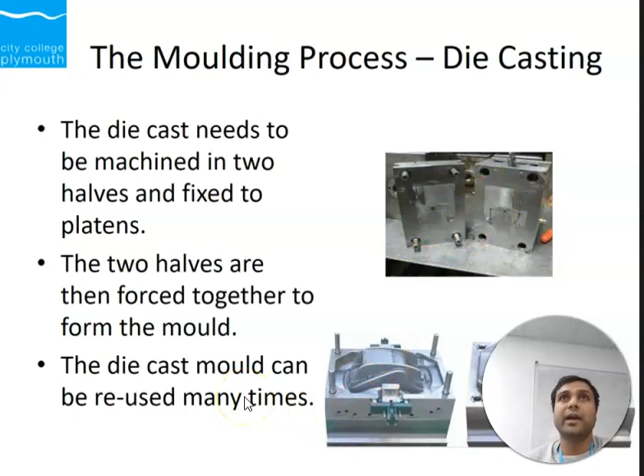All die casting has at least two parts. The ejection, all these things happen through an automated process. Now you can see here the die cast, these are the ejection pins, in two different halves, and they are fixed together. The die cast can be used over and over and over again. Advantage of the die cast as compared to sand casting is a very good surface finish. Sometimes we don't have to perform a lot of secondary finishing process.

For if you're producing thousands, 10,000, 20,000, it's more economical. It gives you good dimensional accuracy and good surface finish. Very thin sections can be formed, and sometimes we can accelerate the cooling. Rapid cooling is achievable. In sand casting, the cooling rate is slow, but metals are good conductors, giving a good cooling rate. The faster the cooling rate, the smaller the size of the grain, which gives them good strength.

Now, disadvantage is it's limited to metal with low melting points. Part geometry must allow removal from the die. For example, if you are forming different multiple parts, you have to open the die, and so on.

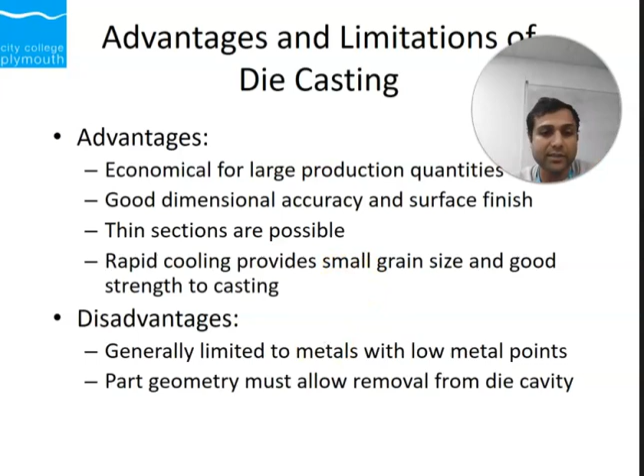Now, the other process is known as investment casting. The first thing we do is create a pattern with wax. Then this wax is usually dipped in a liquid slurry where we have ceramic material. We make the slurry of ceramic materials, and we dip the wax into that, and we put the wax on the sprue.

When that thing solidifies on top of the wax material, we put it in a furnace where the wax is melted and removed. When the wax is removed, we actually pour liquid metal into it.

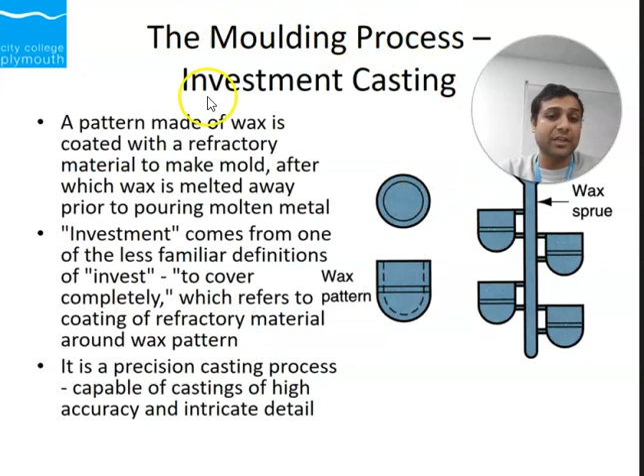The advantages are we can achieve very intricate shapes, very intricate size, very good dimensional control, and very good surface finish. We can reuse the wax as well. This process does not require any machining, it's actually the final product you get. Now disadvantages: multiple steps are required, high skill level is needed, and it is a very expensive process in terms of costing.

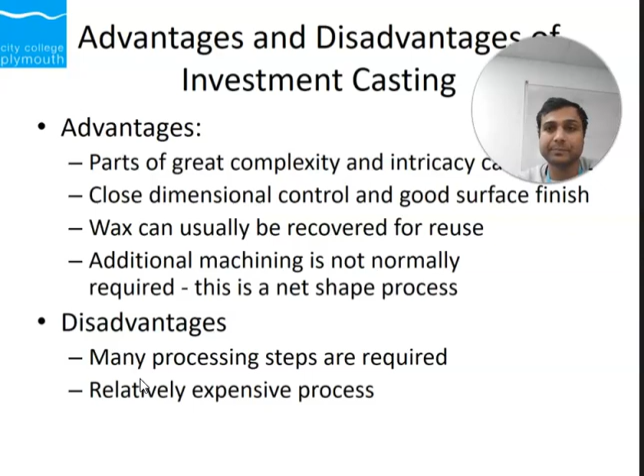Now, after general casting, there are certain secondary finishing processes we have to do: trimming, removing the core, cleaning the surface, and then inspecting it as well. The inspection is mainly non-destructive in nature, where we check if there's any inclusion, any micro void or air bubble in it, which will affect the properties of the material, and so on. We can do heat treatment later on to create homogenization, where all the material has the same properties.

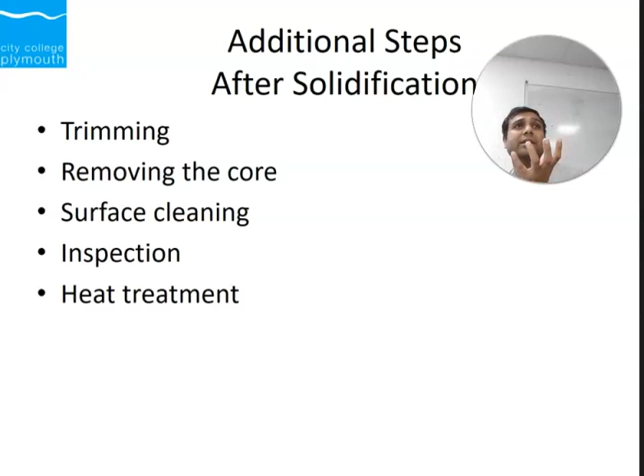Now, castings, when they're done, are mostly heat treated afterwards to enhance their properties. Why do we need to enhance the properties? Because the casted objects are sometimes quite brittle. So later on, when you are performing machining, we don't want them to break, so we perform that process.

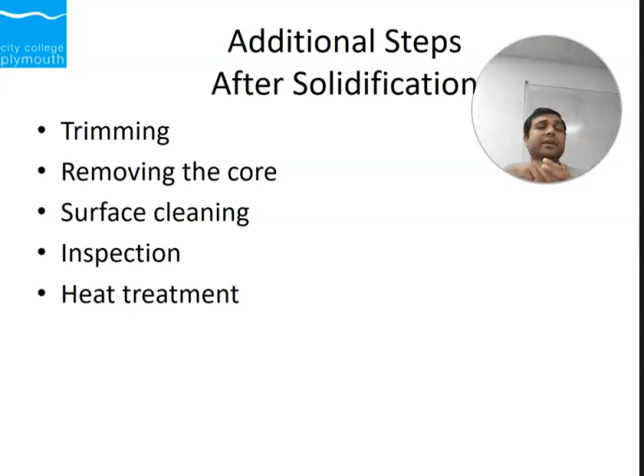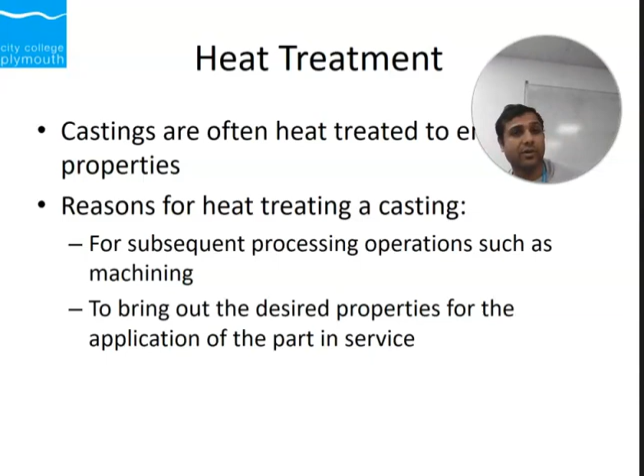Sometimes we want to have enhanced properties, so we carry out some other type of heat treatment. We want to have desired properties, so we do heat treatment. We want to make it ready for the machining process, so we do heat treatment.

Most castings are made up of alloys. They are easier to cast and give you better properties. Why are they easier to cast? Because the melting point of alloys is a lot lower than these pure components. So if you have iron, let's say around 1300-1400 degrees centigrade for pure iron, and you put aluminium in it, the melting point will decrease. Melting point of aluminium is around 660 degrees centigrade.

But if you have pure aluminium and you add iron in it, the melting point of aluminium will further decrease as well, from 660 to that lower point. This is a metallurgical law, which says the melting point of pure elements is always higher than the melting point of its constituent alloys. So we do the alloying to reduce the melting point as well, to a certain limit.

Now, when we do the casting, it's classified as either ferrous or non-ferrous casting. Ferrous is anything that contains ferrum, iron, and we have a different classification. Anything containing more than 2% carbon is known as cast iron. Anything containing less than 2% carbon is known as steel.

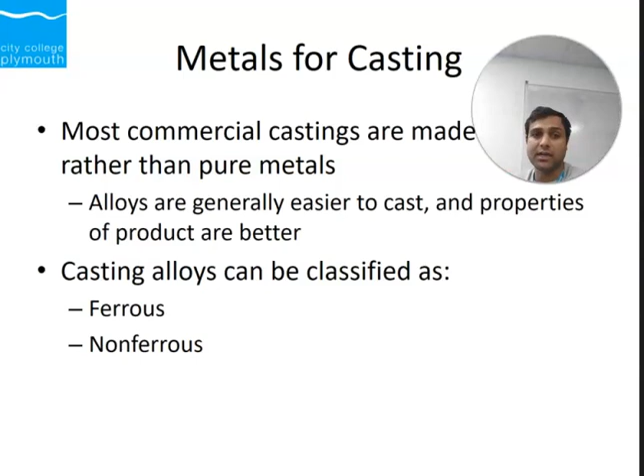Then we have different types of cast iron as well. We have gray cast iron, white cast iron, malleable cast iron, alloy cast iron, nodular cast iron. Now, we also assume cast iron is brittle, but there's a type of cast iron known as ductile cast iron as well. We'll talk about that one in detail.

So we have a malleable cast iron known as ductile cast iron. It has good castability, good ductility, and so on. And it's good for machining purposes as well.

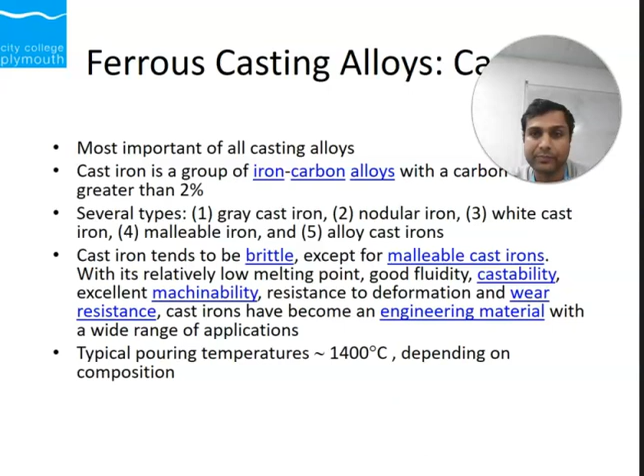Now then we've got the ferrous casting alloys. For example, iron steel is casted initially. It's converted into different shapes and sizes, sent to different industries, which can convert it into different sheets, tubes, pipes, rods. Pouring temperature is usually kept higher than the melting point.

The reason is because if it's kept at melting point, as soon as it touches the die, the temperature is going to reduce a lot. So we want to make sure it's higher than that temperature. So there is some temperature loss, but it still has some fluidity.

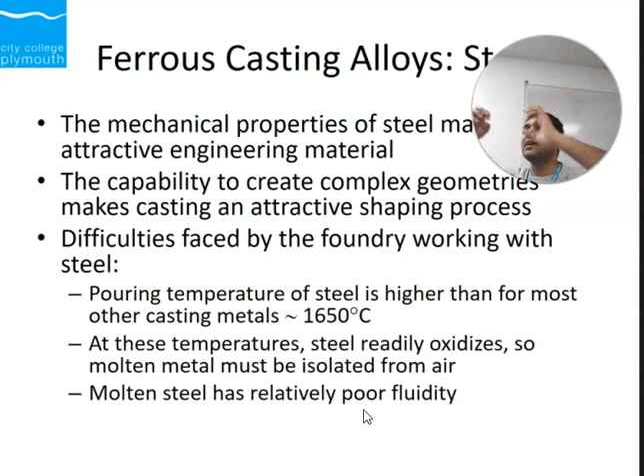Molten steel has poor fluidity, so we have to remember that. Molten steel can react with the oxygen present in the air. So straight away it will react and form iron oxide. So if you are pouring molten iron, it's reacting and it kind of gives you a very nice firework as well.

Now, if we are pouring a metal and we assume that metal is very castable, we make sure the pouring temperature is low, which means we are saving energy. So temperature, we say is TM 660 degrees centigrade, that's the melting point of aluminium.

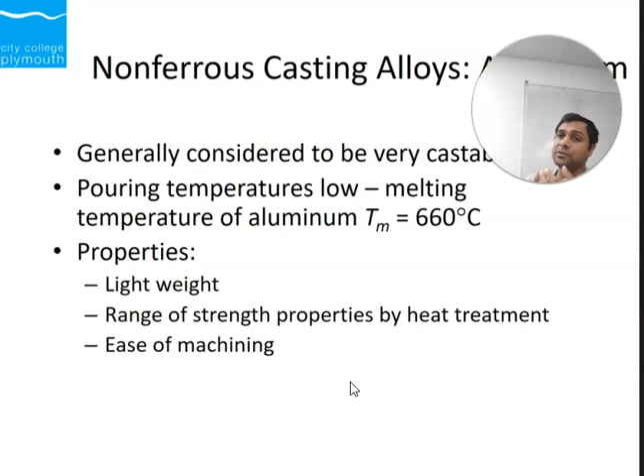Non-ferrous metal, they are lightweight, they are easy to machine, and their properties can be adjusted by doing heat treatment. Non-ferrous metals have other properties as well. They have a good aesthetic look, good bearing abilities, corrosion resistance properties as well. Then there are issues with them too, which is the cost and massive applications.

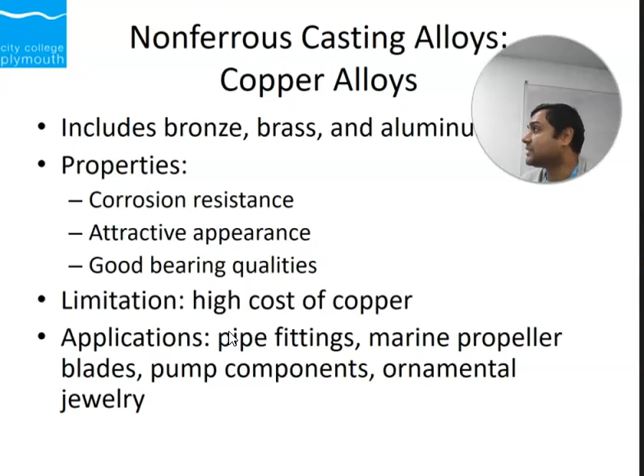Let's say we talk about zinc alloy. Zinc alloys have high castability, common use in die casting. It has a low melting point, which is 420 degrees centigrade. It has good fluidity. It has low creep strength, so casting cannot be subjected to high stresses. Creep strength is tensile testing at high temperature. So the material behaves very differently at high temperature and cannot withstand high strength.

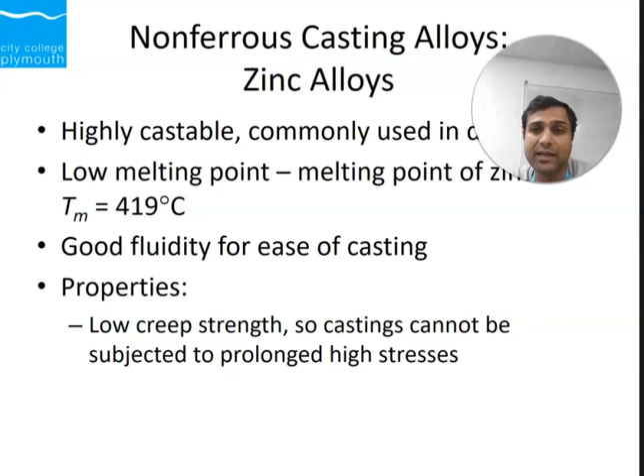Now casting, we said it can be used to produce complex parts, complex geometry, and so on. But there are a few things we can avoid. We can have a simple mold making process if we can eliminate the need for making the core, so if you're creating a hollow component, we need a core inside as well. Then if we can try to adjust the geometry, the cooling rate is properly adjusted, so it can give us high strength rating as well.

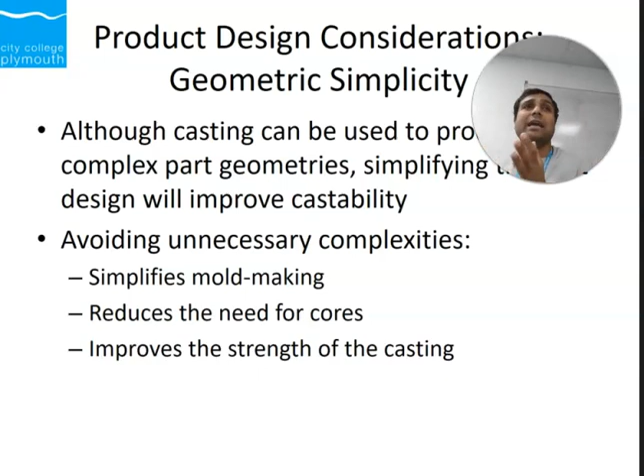When pouring the molten metal, we need to make sure we avoid sharp corners, because that's the area of stress concentration. We need to provide a certain fillet along the sharp corners as well. It's not only for the metal to flow, because when the metal flows, if the corner is sharp, it will create a kind of non-laminar or turbulent flow. That turbulent flow can take away the soil particles if you're doing sand casting. If not soil, if it's die casting, it can damage the corner of the dies as well. So we need to make sure we avoid these sharp edges and so on.

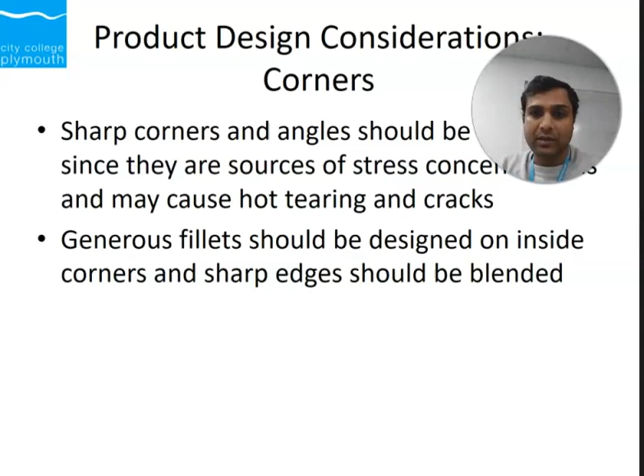Depending on what process we use, we can achieve the dimensional accuracy. Sand casting, not that much. Die casting, yes. Sand casting doesn't give you good surface finish, but die casting and investment casting give you a lot better surface finish.

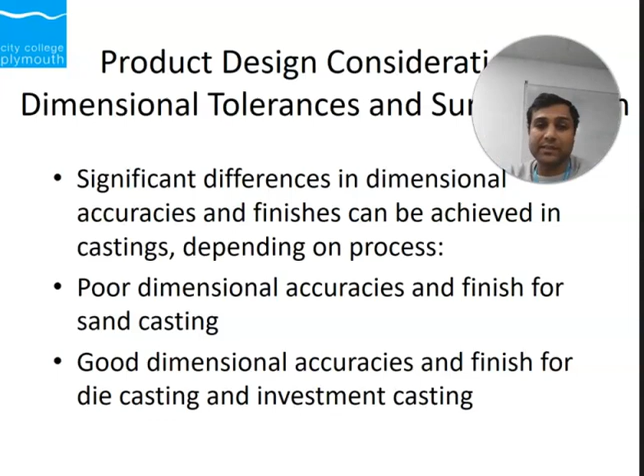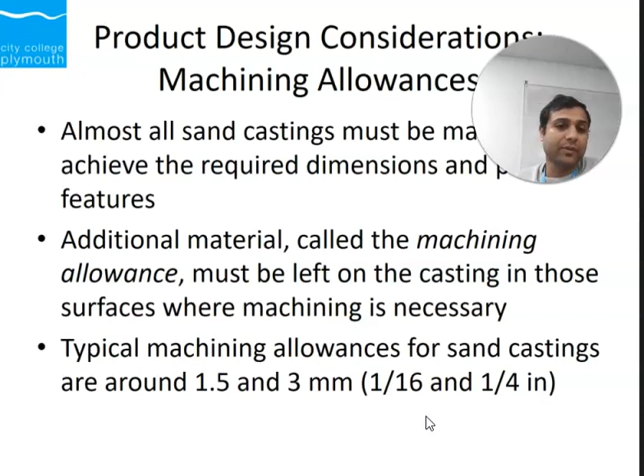All sand castings have a thing called segregation, we'll talk about that one. All sand castings, we leave certain allowance for machining as well, polishing, machining, and certain secondary finishing. Typical machining allowance is around 1.5 to 3 millimeters.

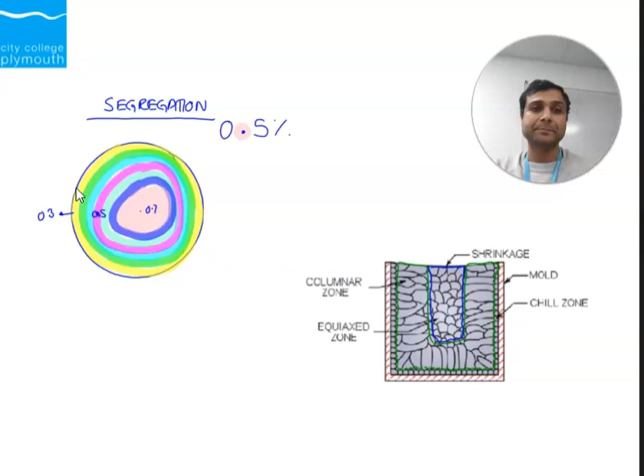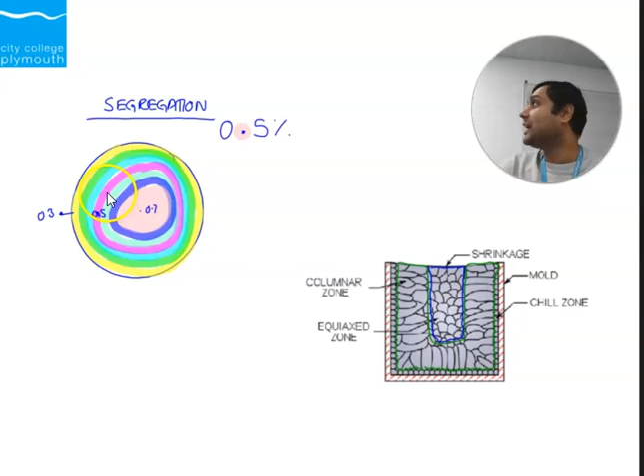Now, if I show you the microstructure and what I meant by segregation, imagine we are doing the casting, and that's the sand casting. The die is on the outer side. When the material starts to solidify, it will start to solidify next to the boundary. Imagine this is steel. So what will actually happen is the first layer that solidifies, steel, which is iron and carbon, has a lower percentage of carbon. And the material that solidifies next has more percentage of carbon. And as you move inside, because the yellow is the one that will...